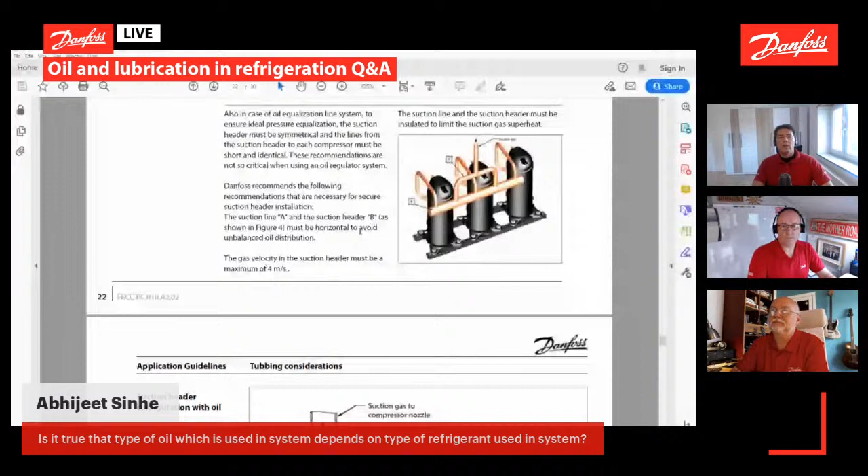Oh, why can I not share my screen now? Here we go. I hope you can see a PDF file now. And if I scroll up, it says overview of oil types. Can you see that? Jens, John, can you guys see that? Yes, yep, I can see that.

Okay, all right. So that's, as it says, an overview of the oil types which are used for the different compressors. And just let's take the first few compressors. There is the MTZ compressor, MT compressor. So one is for R22 that uses a mineral oil, and for other refrigerants like 404, 407, 449, 452A and so on, there is polyolester. And then you see the name of the oil, which has to do with viscosity and stuff like that.

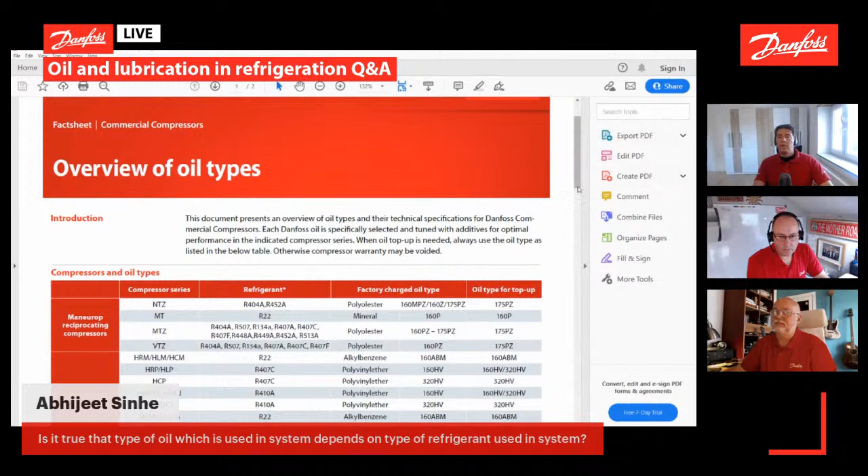But as you can see here, there are different refrigerants listed for the different oils, or the other way around, different oils for different refrigerants and different compressor types, depending on whether that's a scroll or a piston. So to make it short, yes, the oil needs to fit the refrigerant you are using in the compressor. Yeah.

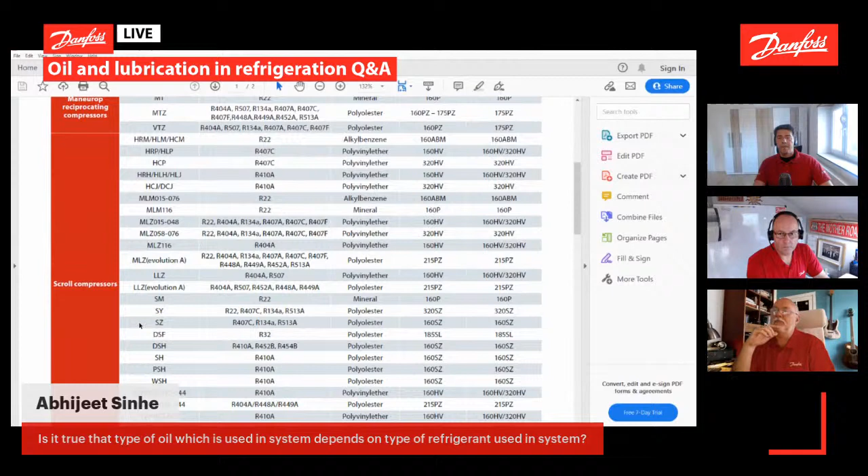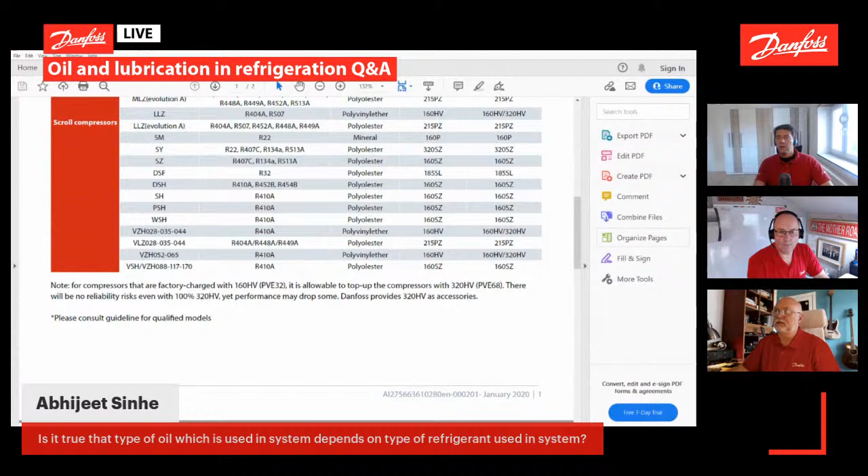We have another question from Harry Prasad. What happens when the compressor is overcharged or charged with excess oil? That's an interesting question, I guess. A lot of that will depend on what type of compressor it is. If it is a small fractional compressor, you've not got so much shell volume there, which is where the oil would be, between the shell and the workings of the compressor. So you could get to a stage where you've got more oil than normal, which would be absolutely fine.

But if you get too much oil, then that will basically get pulled into the suction tube, the suction galleries of the machine, and then your compressor will try and compress oil. And as I always say in many trainings, the compressor is a vapor pump. It's not a liquid pump of any form, whether that's oil, refrigerant, water, things like that. So if you get to that stage, then you will start to pump oil, and you will unfortunately damage your machine.

So a lot depends on the type of compressor. If it's a larger compressor, then you've got a larger shell volume. And for some of the MTZs and things, you would have to have a lot of oil in there to actually fill it up to a point where it spills over and gets into the suction side of the machine. But obviously it's possible. So I don't know what that limit would be, but on some of the larger machines, that's quite a bit of oil.

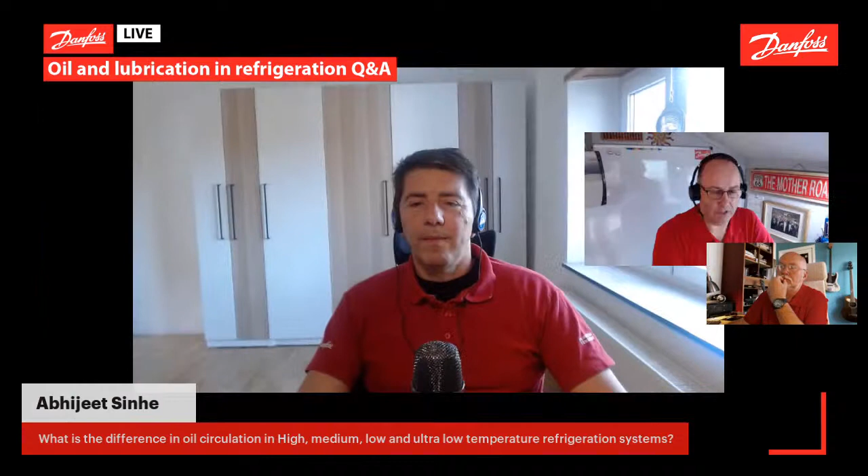Yeah, I would say the same thing, Jörg. What I generally say when I do training is that the lower evaporating temperature you go, the more important oil velocity, suction velocity, refrigerant velocity within your pipes becomes, and good piping design becomes. So if you're evaporating at -28, -30 for a deep freeze room at -22, then it is incredibly important to get your velocity right in your suction line. Make sure your pipes slope back to your machine, all the general things that we should be doing anyway.

If you're evaporating at -5, of course it's still important, but as Jörg said with his sticky oil, I like that, it will leave the evaporator far easier at -5 than it will at -30. Yeah, put honey in the refrigerator and you see what happens to an oil that you put to ultra low temperatures. That's really what happens. It gets that sticky. Honey and oil, yeah.

Good thing. Another question, Mika James is asking regarding oil level controls. Is it an issue if the oil is not at a stable level in the oil level sight glass? Well, as long as the oil level fluctuates between acceptable, what's wrong today? It's not that difficult, that word. Acceptable limits, then a fluctuation is okay, and can happen if you have multiple evaporators, you switch evaporators on and off, or if you have multiple compressors. And acceptable levels, of course, depend on what the compressor manufacturer is saying.

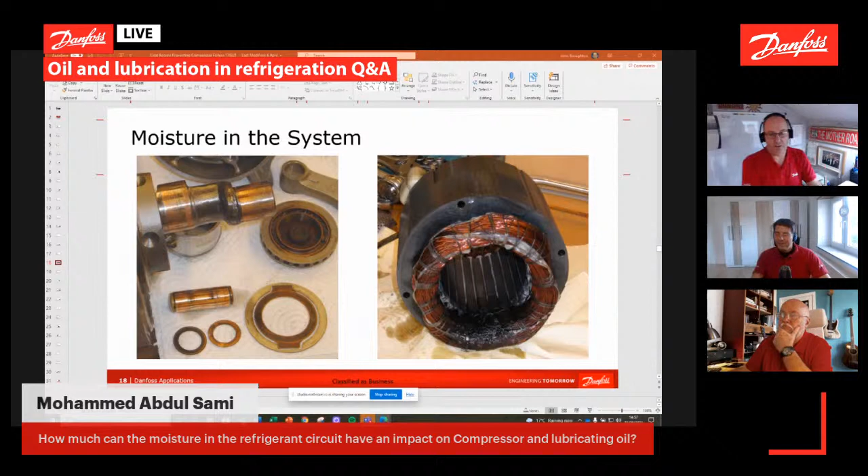And, you know, I've actually somewhere not accessible, but I've got pictures of a compressor that we inspected some years ago, and it was rusty inside. There was physical rust on the inside of the shell. So there was a lot of moisture in that system. So yeah, just to show that.

Great. Another question, Jon Jon Notario. What can I do if the oil level on the sight glass of a compressor will be continuously low? Recharge oil, or put additional oil in? Yeah. Really, very, very simply, there is probably somewhere a place where the oil has gone and where the oil is sitting now. It's constantly being replaced there in that area.

But let's take a U-trap. The U-trap was empty, and now there is sitting some oil in the U-trap, and there's new oil coming. Some existing oil from the U-trap is going back to the compressor. So there is an oil flow in your system, but that oil in the U-trap is no longer in your compressor. You miss that amount of oil. So if it's not constantly going down, but if it's constantly low on the same level, oil is sitting somewhere else, and you need to refill, or you need to add oil.

That would be my approach here. John, what do you think? Yeah, I would say the same thing. Find out why. If you have topped the system up with oil and you're not getting that oil level staying stable in the machine, then yeah, I would look at pipework design, velocity, obvious oil traps. If you have any vertical risers, for example, things like that in the system, look at the pipe length.

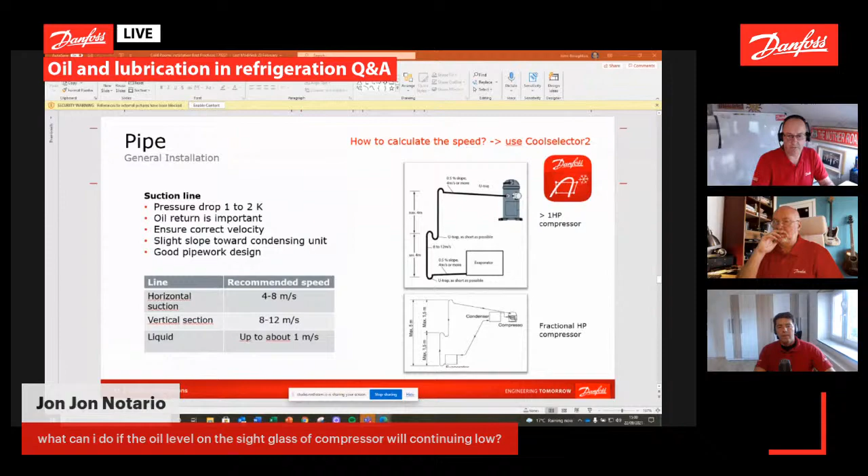Great. I think, John, maybe you have already answered the question, kind of at least. The next question from Omar Henry. Does the size of the oil riser on an individual circuit in a supermarket refrigeration rack system affect oil return? Yeah, I guess that is the... I'll just put that slide back up.

There we go. So basically the risers, particularly in supermarket work, we've got very long pipe runs from the display cases back to the pack or rack. So that is incredibly important. We get the right velocity, the right pipework size, and ensure that we do good piping design using oil traps and swan necks and U-traps, etc., so that we are getting that oil back. Because if you think of a supermarket installation, normally you have the display cases on the shop floor. Normally the pipes go vertically up onto a cable tray that goes across the top of the store and then away to the pack and rack location.

So you've got this perfect sort of, if you can see my hands, we go from the display case here, the pipes normally go up along the top of the store and then possibly back down to ground level again to where the rack is. So we've got this perfect oil trap scenario, and that velocity and the good pipework design of those risers is incredibly important. So in answer, yes.

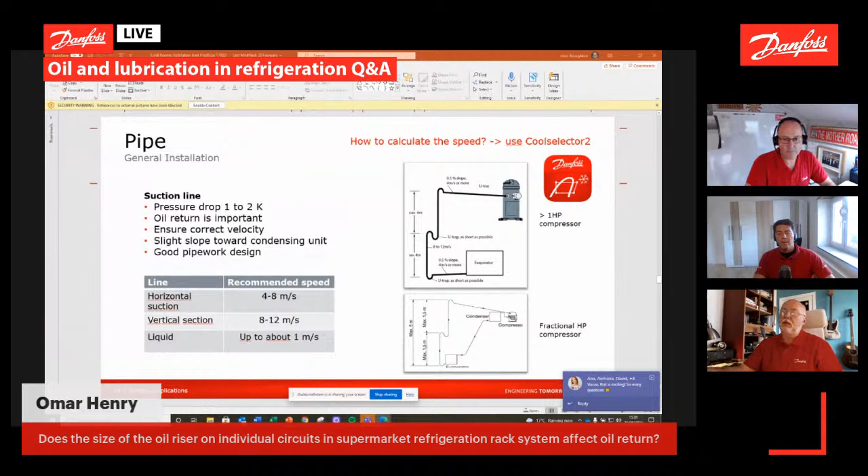Yeah. We got another question from James Steiger. This is quite an interesting question, actually. I don't know if you can answer this. Would an optical oil level sensor know the difference between oil and liquid refrigerant? I don't know that. Do you know, John? Because I don't know that, but in other work I've done for Danfoss, I've worked with optical sensors, and in general they know the difference, but it does depend how much foaming you get as to the accuracy of that. So a bit difficult to answer because I've seen it both ways.

I've seen them know the difference between oil and liquid, but then if you have a foam that's quite dense, then I've also seen them register that as a level as well. So a bit of a difficult discussion, and honestly I don't know the perfect answer. I know from years ago when the optical sensors came onto the market, some worked, some didn't. They were a bit temperamental. I'm sure things have got a lot better, but I've not had that much experience, so difficult to comment further.

Yeah. Another question from Jon Jon Notario. What is the possible cause of bad odor from compressor oil? Why does it smell?

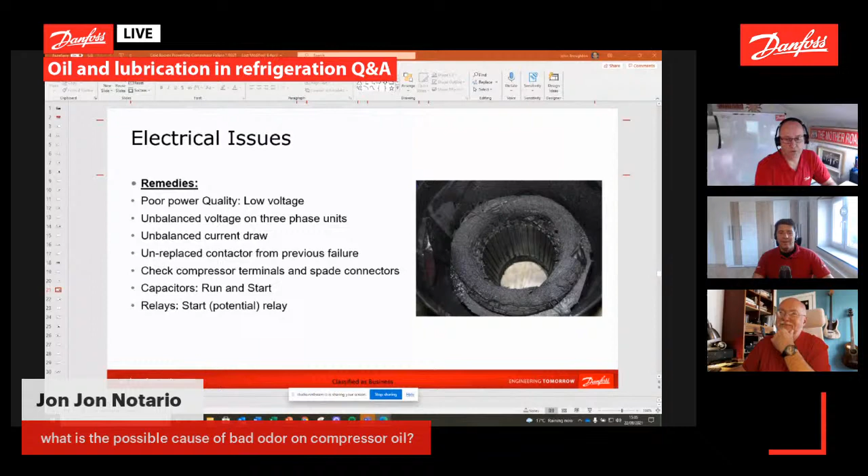I've just put a slide up, hopefully, on the screen, and I don't know why it's not. There we go. That is a real burnout, and I don't know what the hell they did to that machine, but if you smelt the refrigerant from that, wow, that would make you probably fall over. So yeah, I think the only comment you could say is that if it smells that bad, then you've got acid in there that is generating that bad smell.

Yeah. We've got another question here on the late hours. It's Johannes Marcosi who's asking, do we have different oils for compressors when moisture in the system contaminates the oil? So you mean that if you have a lot of moisture in the system, you use a different oil which can handle the moisture in a better way? I guess if this is the meaning of the question, no, we don't.

That's not the approach. The approach is you use the oil that is specified, and then you make sure there is not a lot of moisture in the refrigeration system. And you do that by evacuating in a good way, by making sure that you don't leave pipes open long, that you don't leave oils open to the ambient air, because there are oils which grab humidity from the ambient air. And then you have to, of course, install a filter dryer in a refrigeration system. And whenever you open a refrigeration system, change that filter dryer, because that one takes the humidity out.

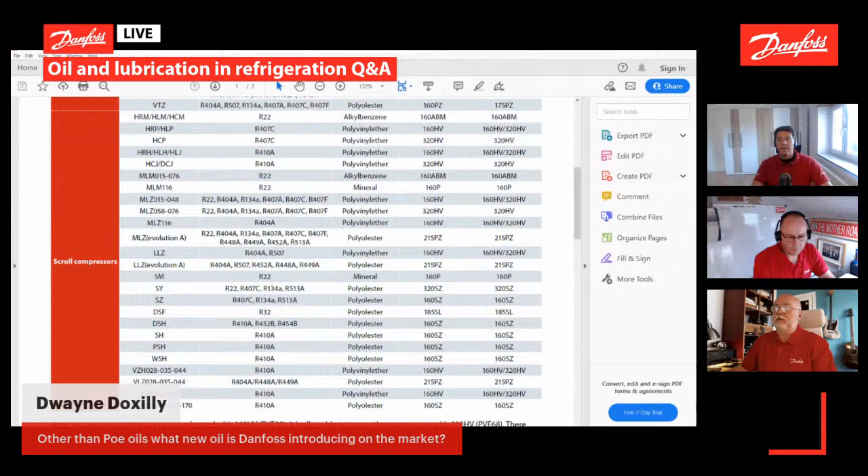Yeah, Abhijit has another question. What care to take while storing the refrigeration oil? Yeah, go, John. Yeah, I guess that comes back to my previous comment, Jens, is that if you're storing an oil, it very much depends on the oil type.

Obviously keep it in its purpose-made container that the oil came in from the manufacturer. Keep it clean from the extremes of temperatures, and if it is a mineral oil, for example, it will keep a lot longer in the service van than a polyester, because it will absorb moisture every time you take the lid off, but it will not absorb as much moisture as a polyester, for example.

And if they have a use by date, obviously don't keep it in the service van for 4 years, because that will not be much good, but really follow the recommendations from the manufacturer of the oil. That is the main thing that I would say. We're putting oil into that compressor to do a job, and that job is to lubricate that compressor. If there's any foreign debris in it, too much moisture, things like that, you're actually going to do more harm than good. So treat it like, as I call it, the lifeblood of the compressor.